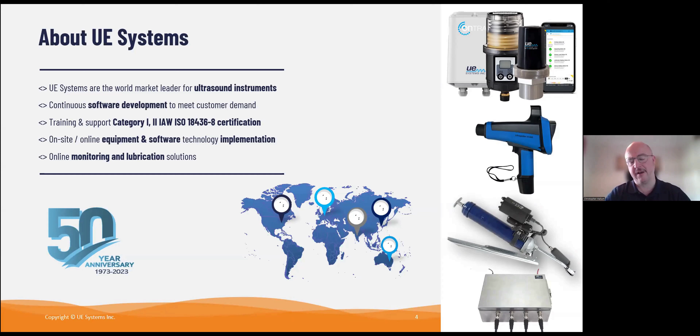So today, what we said we're going to do is talk a bit about ultrasound. I want to introduce UE Systems as well, so you understand who we are, who we're representing and where we're coming from. UE Systems, for those who don't know, are global manufacturers of ultrasound technology, providing tools and equipment along with software, training and support globally to users in the field, be that in industry or from a service perspective to service providers. We provide that reach globally. Based originally out of New York, we're part of the European division based out of the Netherlands, but we have regional offices all over the world with regional partners providing support in the local languages and local dialect.

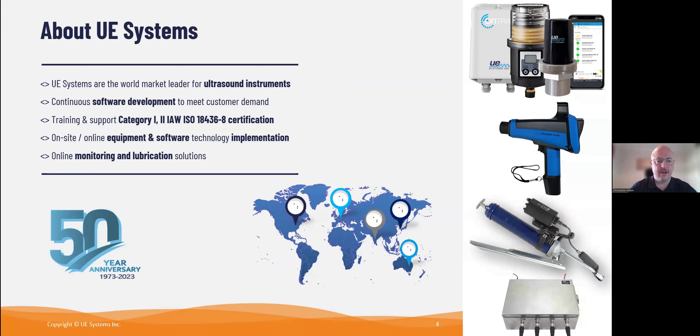James, a little bit about JPS please. Yes, so JPS Reliability was started about 4.5 years ago, myself and James Pierce, when we wanted to do things the best way we could and have full control - we wanted to do our own business. We've built up on decades of practical experience fixing real life problems using all the condition monitoring technologies. As a business, we support companies through reliability and maintenance, making sure they do the right maintenance tasks using the right technologies, which in the bottom line keeps production running.

So we're hands-on mentoring training. We do remote and on-site training. We do global support. So we support service, mentoring, and systems worldwide, and we support quite a few different sites around the world, assisting them with analysis and reliability.

Excellent. Thank you, James.

So some of the things that we wanted to cover here, and you'll probably all have seen different renditions of these P to F curves, depending on the technology that someone's trying to sell you maybe, or trying to convince you on. Something we want to talk about here is a lot of people talk about this in terms of reliability. And as you've just seen from our headline screen about improving the availability of your assets, making sure that you can have that asset running as and when required and keeping that uptime going.

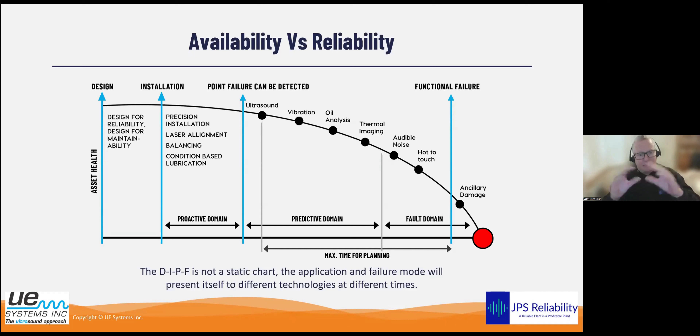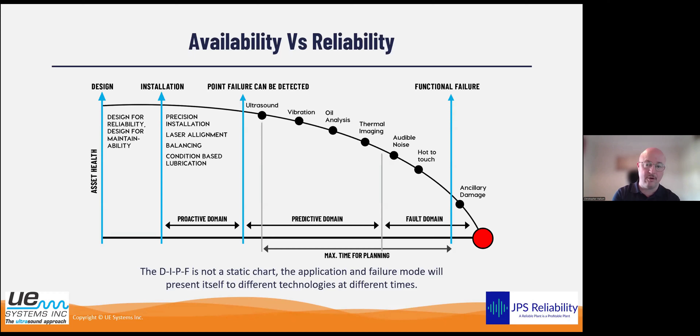So this helps guide people, and there's so many different PF curves for different types of failures. So it's a generic to help guide you to do the right thing. But in reality, nothing fails lovely like that. And the bathtub curve is basically 99% random failures. Absolutely. Theoretical. So it's kind of like a sliding chart, you could say, depending on the type of failure mode and the type of asset you're looking at. Yes. But again, we have multiple technologies available out there that can help guide us and spot those early warning signs.

So we decided to do this webinar today because we always come across a lot of people that like to have a bit of a fight between the two technologies, one versus the other. And from my experience in the world of reliability, we should never be looking at one versus the other, but actually understanding them properly and understanding how we can apply them as part of a mature, comprehensive program.

It shouldn't be ultrasound versus vibration. It should be ultrasound and vibration. How can we use them together to help us get the best data, to help us get the best from our assets and our plants? What do you think, James?

Well, as I say, at JPS Reliability, we use ultrasound, vibration, thermal, NDT, the whole toolbox of condition monitoring tools. And on jobs, often we use vibration and ultrasound together. And it's not that they are different, but later we'll delve more into where vibration does this and where ultrasound does that and how they really work well together. So they're not competing technologies, they're technologies we should use together, choosing the right range or application to use them.

Absolutely. And something we always have to think about as well is that when we're looking at a plant and at criticality analysis and at what can prevent things from happening in production, not everything that fails is down to something rotating. So we have to think about other applications as well, not just one technology for one area. That's where we can use these technologies to our advantage.

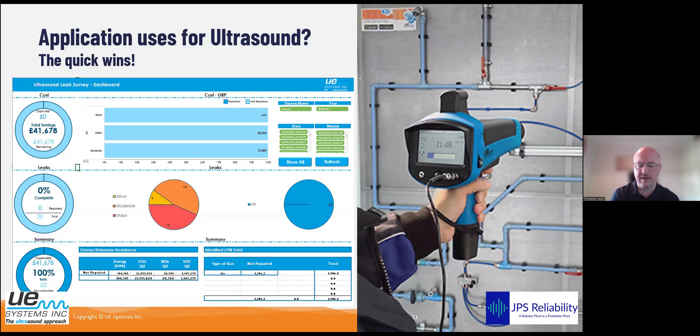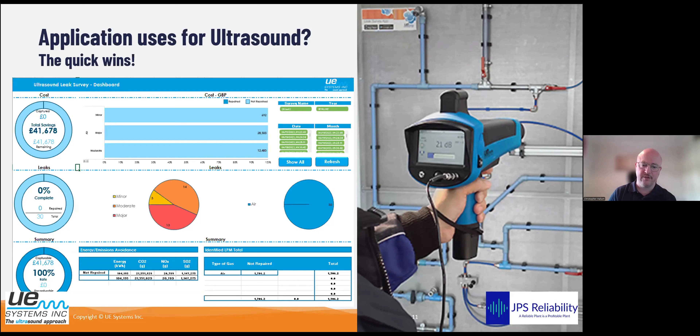If you look at the cost of energy these days, it's not cheap, and compressed air isn't free. And most plants on average will find that their leak rate is between 30 to 40 to 50% in places and poorly managed systems. So by being able to use ultrasound to identify leaks and put cost to them, we can get quite quick returns for our investment when starting an ultrasound program. So always something to consider when you're using ultrasound for certain applications is that leak detection is going to give you your quickest bang for your buck. So that's ultrasound.

James, how about a little bit of an introduction to vibration? Yeah. So with vibration, people who I've been on site with know I could chat for hours about this, but very, very simply, vibration analysis can be simple and it can be really complex. There's so many different types of tools, from very basic little pens to detailed analyzers to wireless and online stuff. And sometimes there's a bit of sorcery involved. You need to be a wizard, and you see all these squiggly lines and you've got to analyze it and tell the customer what's in there.

So basically, everything in the world moves. If we have a sensor sensitive enough with cabling and the correct data collector and setup, you can measure the vibration. So vibration is used 99% on everything in the plant for rotating equipment. If something rotates, it rotates at a certain frequency, and all those components in that motor, say, will have a frequency for each component. And we measure those frequencies.

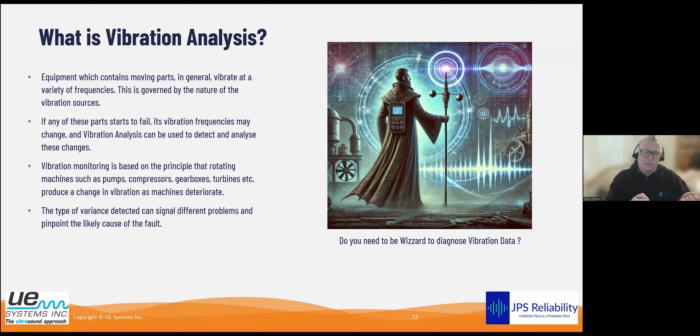And the theory is, and in reality, as assets start to wear and fail, the frequency would change, either modulate or go up or go down. So by monitoring the frequencies and measuring it, we can detect when there's a change. Now you can do that quite easily, but then you need to understand why there's a change and is it a risk to site.

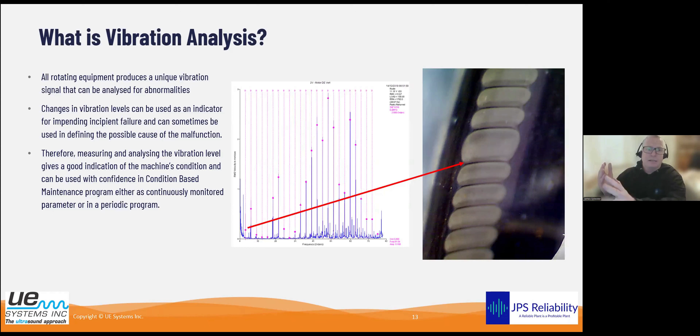And with vibration, where vibration and ultrasound are quite close now, is the technology advancement. So really high frequency, if you sample above 20 kilohertz, and some kits can sample really high on vibration, we can then do demodulation. So that's the first type, you see it there. Then you come back into acceleration and velocity. Now this example here highlights the importance of sampling.

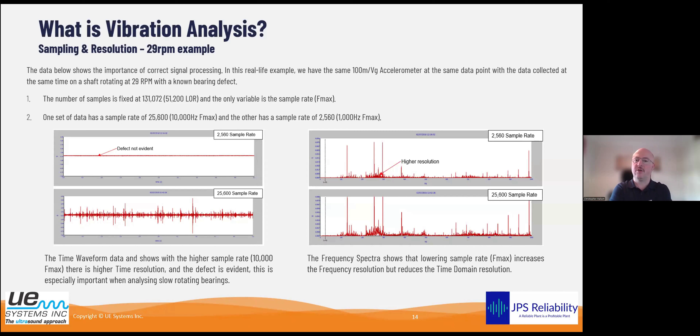I think this is probably a pretty good example of where a user on a plant could deploy both technologies for these sorts of things, depending on the equipment they actually have. And I think that brings us on quite nicely to one of our first case studies here today. This is one that I came across out in the field while doing a demonstration, actually. Something that doesn't happen very often is finding something as serious as this when you're out there. It's kind of picking the right time.

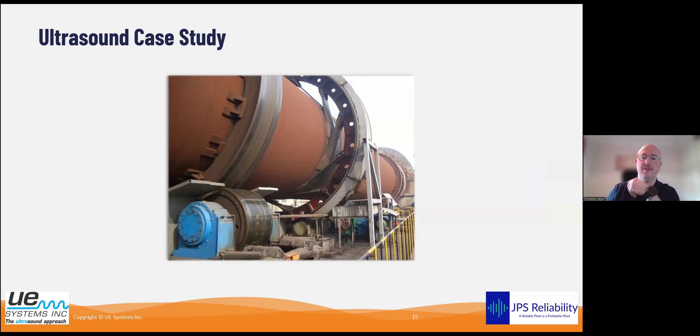But this was looking at some trunnion bearings on a kiln. I was utilizing the Ultraprobe 15,000 with a very simple contact module, setting the frequency to 25 kilohertz and literally listening away to see what we could detect. Now, this asset was extremely large with dual rolling element bearings, rotating at approximately 7 RPM. This asset was only 6 months old as well, so it's very new.

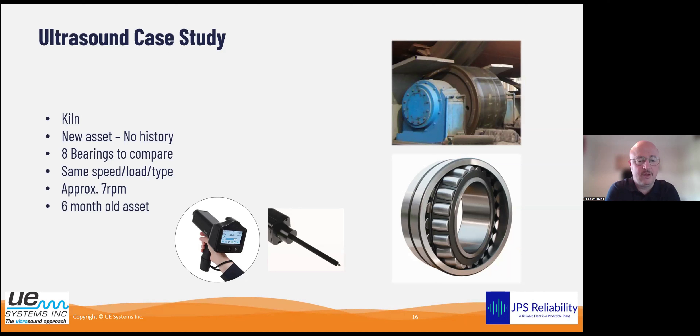But the engineers on site wanted to make sure they could use the right sort of equipment to help identify changes as early as possible, because if they had unscheduled outages on here, they'd have big problems. So we had a little look at each of the bearings on this asset. And because we had no historical data, we were going to use a comparison method to look at each individual bearing, just to get some data and an idea about what's going on.

So I took readings at the same point on each of the bearings, and 7 out of the 8 registered 0 decibels. I could hear a very faint white noise of the bearing, the friction of the bearing, in my headphones, so I could still do a sound recording to use as comparison. And this is what 7 of the 8 actually sounded like. So as you can hear, smooth and uniform, and looking at the time waveform there, nothing sticking out, looking pretty good.

Now I came to the 8th bearing, and in my headphones I could hear a very faint ticking sound, and I could see a register of 2 decibels on the screen. Comparing that to the other 7 at 0, that's quite a rise when they should all be around 0. Using the software with the Ultraprobe, I was able to amplify the sound to show the user what was being detected, because my initial concern was that there was damage to the bearing. I wanted to do more analysis first, but my first thought was there's damage occurring.

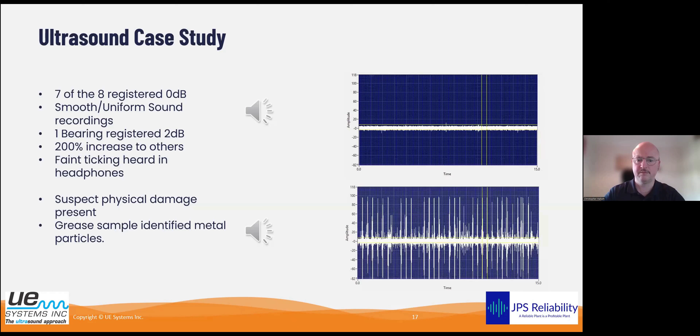So as we can see, by just doing simple comparisons, all of those bearings were under the same speed and load and same design, same type, and yet 1 of 8 looked very different to the rest, and you could audibly, clearly see that there's a difference there.

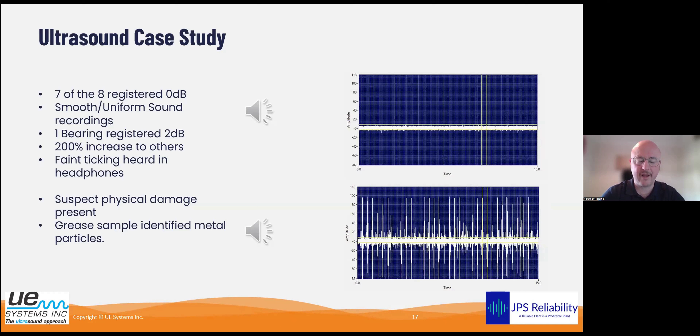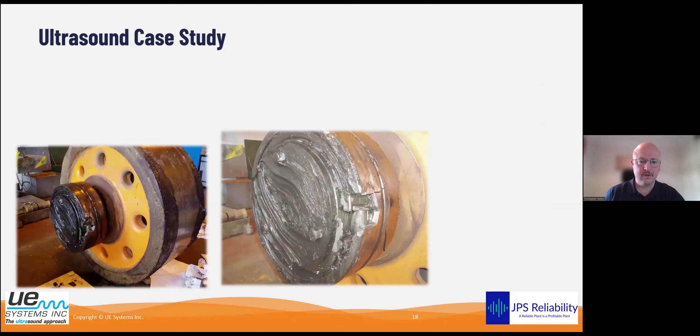So eventually the site took my advice that there was something seriously wrong here. They planned in the maintenance, and a week or so later, I had some pictures sent through to me. As you can see on the screen, as they took the bearing out of the housing, part of the outer race had fallen off. The cage had been damaged and one of the rolling elements had moved 90 degrees.

And we could see that in the time waveform as that rolling element slid over the cracks instead of actually rolling over them. It turns out upon further investigation that this was damage on installation as the kiln was being lowered down and impacting.

But James, I can think of at least 3 high-end vibration kits where, if correctly set up, you can pick up defects, and we've had defects, would you believe it, with a quality 100 millivolt G sensor on the dual rail mount down to like 10 RPM. If you sample correctly and know what you're looking for, like ultrasound, you can pick it up, but there's only a few kits can do that at the moment.

That's the thing, isn't it, James? It's just making sure you understand it, really. Yeah. And making sure you get the settings correct. And if you have the capability, that's great. But it's also not listening to every sales guy who says they could do this when it might not be able to. So it's all about getting the right things in the right places, isn't it? So, yeah, understanding what you're getting. Absolutely. So yeah, this is one of my favorite case studies.

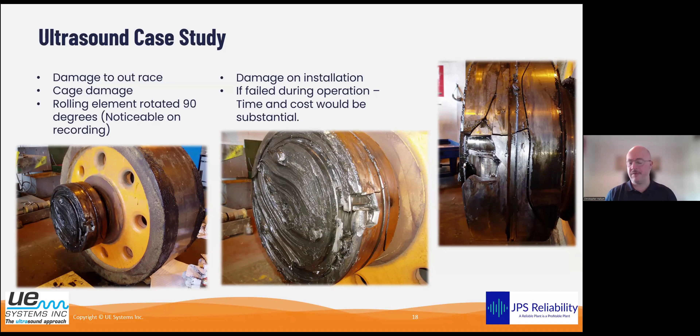But I think I've had enough of talking for a little while, James. I think we should pass over to you, and you just let me know when you want me to move the slides.

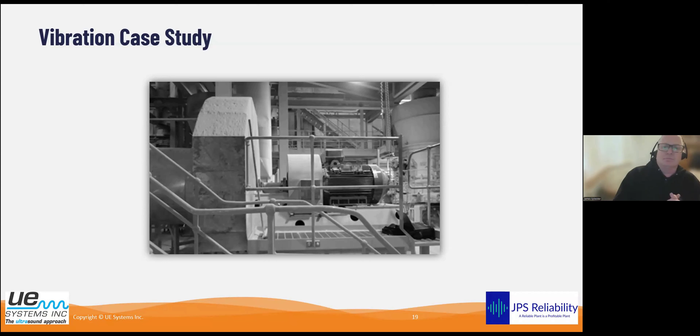So we've got over 100 case studies in the Book of Gold. So I'm just going to go through one quickly. At this particular site, we got a couple of motors and fans, and they're standby duty. So if you look to the next slide, Chris, it's noisy. You go on site, it's a noisy atmosphere, a noisy area. And like Chris with ultrasound, you don't need history to diagnose a defect and put a risk against it, if you know what you're looking at and you understand the machine.

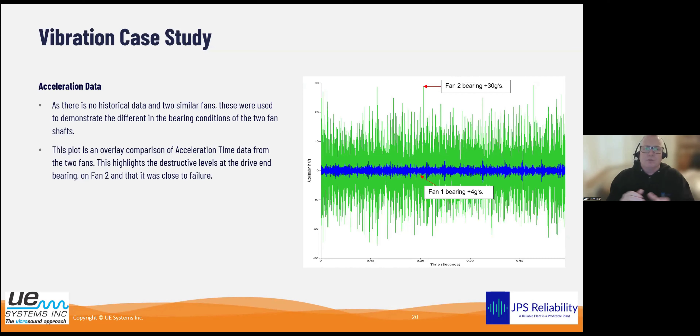And this one was at 4.9 orders. Most software now with vibration analysis, all the software, the online stuff, offline, if you know your bearing, you could type it in, it gives you pretty little cursors, but you do not need to know what the bearing is to call it a bearing defect. You've got to understand the waveform and the pattern and the data.

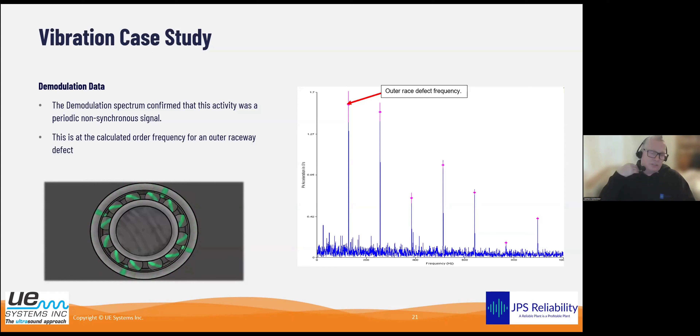So what you've got to think when you come to real life situations: you've got this big bearing, could be covered in grease, or you clean it off. You're not going to scrape it down, file it, rub it down with emery cloth, put a bit of beeswax to get a good contact. You're doing routine monitoring, you're using a sensor, either a flat or dual rail.

And also, if you imagine the bearing there and the bearing spinning around, for that inner race, it has to be loud enough to pass this or transfer the pore grease through the rolling elements out to the outer race, to the outside, to measure it on the outer race. So we saw the outer race signal higher.

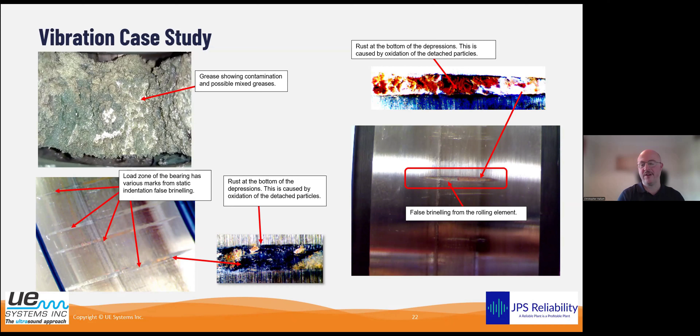Absolutely. Root cause analysis, identifying what caused it in the first place, and then finding ways in which you can then mitigate for that and reduce that will actually then in turn help improve the reliability of those assets. So absolutely, yeah, I think that's a great message for us to get across there.

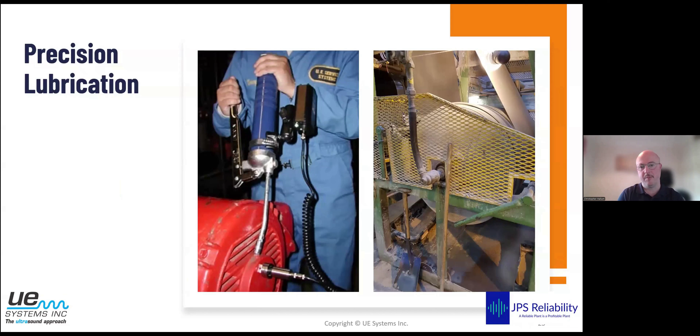So another big area when it comes to these two technologies is lubrication. It ties handily in with rotating equipment and our bearings. You know, it's one of the areas that sometimes it's just so overlooked in some places. I think it's starting to get better in some places, but it's still an area that I think is highly overlooked. If we look at premature bearing failures, 80% are caused by some form of poor lubrication practice, whether that's contamination, using the wrong type of grease, going long periods without greasing, or putting too much or not enough in.

How many times do you see people have a PM that says 10 shots of grease and they'll put one in just for luck, things like that. James, you must see this when you're visiting customers on sites, the bad practices that are out there.

They make them cheaper, they make them thinner, they don't last as long. They come up with sealed bearings, which are sealed for life of the grease, not the bearing, and they push lubrication down, down, down to the bottom where lubrication is the lifeblood. If we're not fixing lubrication, aligning, balancing correctly, then you're on a hiding. Your assets aren't going to last. And using vibration and ultrasound together, you can start picking up misalignment, bearing issues, grease issues, and start eliminating it.

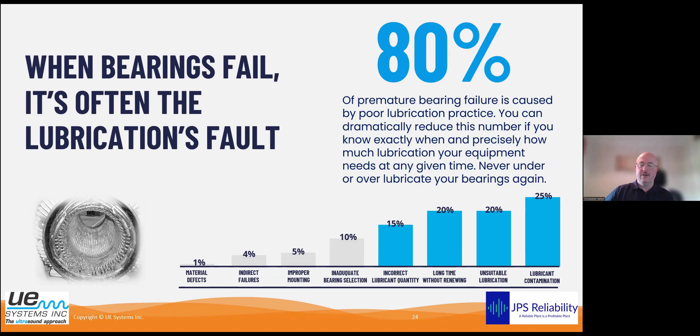It's having all those things in place because the amount of times that I've seen a company invest in technology to help their lubrication, yet they're going around and picking up a grease gun off the floor to go and grease something, not knowing what's in it. It's not going to help. Getting the basics right first is equally as important because if you don't have those, then you're onto a losing streak already.

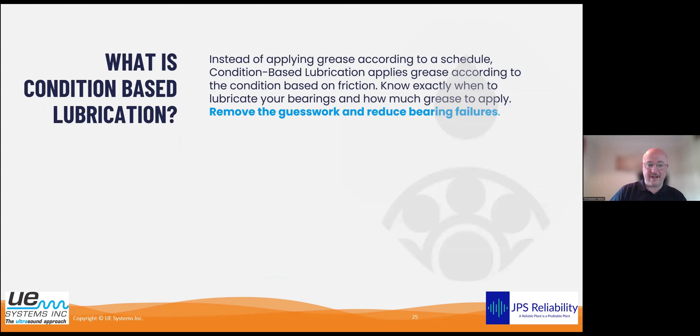So let's move on from our tragedy that is 80% of premature bearing failures being lubrication related. It's all down to friction. If we don't grease our bearings correctly, or we allow contamination to get in, or we have too much going in, it's going to affect the level of friction in the bearing. And that friction is going to get worse and worse and cause more and more damage to the bearing itself.

Now, if we think about traditional, most commonly done time-based lubrication practices, people will go and grease their bearings at a certain interval with a recommended amount. Now, that recommended amount, is that the right amount? That's always the question I ask. And the answer is normally, oh, I don't know. It says it on the PM, so that's what I'm going to do.

And so they do that, and then they take a look at the bearing sometimes and think, I don't see any grease coming out of the side, so I better put some more in. Oh, now it's coming out the side. Now I'm happy. Oh dear. So if we think about time-based, is it the right time when they do that? Does the bearing need it actually at that time every single time?

So this is where predictive technologies can help us with identifying that changing condition. If we think about it from an ultrasound perspective to start with, is that we're looking at the friction. The friction generates the ultrasound. So we can look for that early change as that friction level starts to increase due to a reduction in lubricant in that rotating asset.

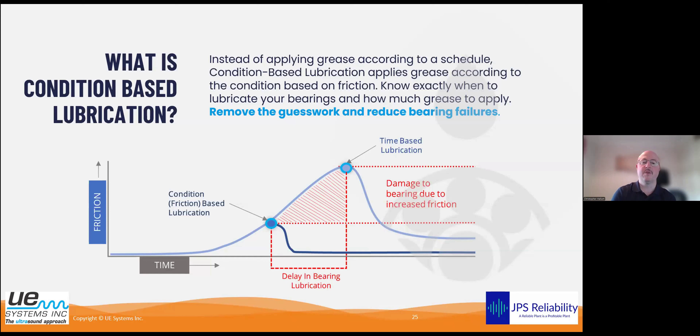Absolutely. So we'll give some examples about what lubrication looks like through ultrasound and through vibration shortly. If we think about it, and we know people haven't got time for these things, the correct way to grease a bearing would be small amounts at a steady rate while monitoring it as we go along. Now, a lot of people have a lot of things to do and a lot of bearings to grease, so I'm going to show you on this next slide what lubrication looks like ultrasonically.

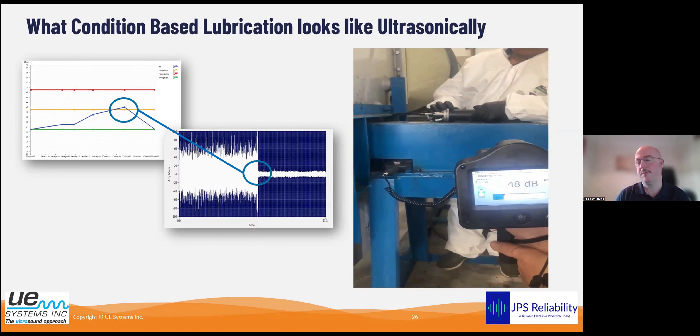So as we can see there, we started at around 58 decibels. What we should do is grease slow and steady, watching the ultrasound level reduce. Once the ultrasound level doesn't reduce any further, that's the bearing telling us to stop - have I gone through too many here for some reason? There we go. Once it doesn't get any lower, we stop.

If we start to over-lubricate the bearing, we'll see the value going up. So as we saw there, he probably put about 6 or 7 shots of grease extra into the bearing, and we saw the value go up. That was an indication of over-lubricating. But greasing a bearing with ultrasound can be as simple as monitoring the decibel value. If the bearing needs it, we'll see it go down. If the bearing doesn't need it, the value is going to go up, so we stop straight away. That way we can get a better idea of how we grease it.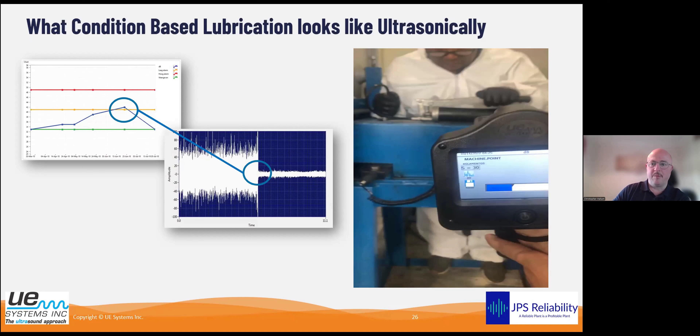So, James, I'm going to pass the next one over to you. Yes, so this is the video of greasing with vibration. Is it working, Chris? I'm going to play it now. There we go, yeah, there we go.

So on this one you can see a waveform live and it's sampling. As you grease, the waveform will come and push down. Oh, jump forward - something's playing up with my computer at the moment. No worries. So when you grease a bearing and you're watching the waveform, as you grease you suddenly see the waveform dip and go. This is what we do on most sites when we're doing vibration analysis, like that. See, it dips and comes down.

The benefit of this is when you're looking at a waveform, you can see basically the pattern in the waveform - you can see whether it's got a periodic impact. So straight away you can go, you definitely got a bearing defect. You can grease it - we had some where it can actually increase, because you could be pushing through grease which has been sitting in a 12-inch pipe for a year and it's gone hard and separated. So you're monitoring it, measuring it, and you can see how it's changing.

Now, on some sites, if you've got lots of machines, what we would do is have a very simple ultrasound tool, because you've got to think about your time and utilization of people. So you'd have a very simple solid ultrasound tool to go around on a routine and measure your bearings' dB level. And if it doesn't change, it doesn't change - you leave it alone.

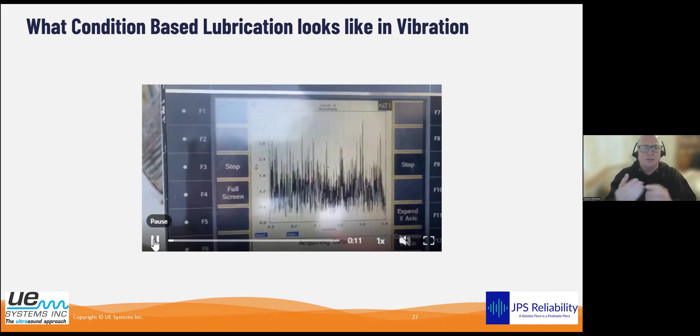If it goes up, you grease it. And then you have a backup as well, where you have the vibration people hitting your critical assets, and they're looking for early bearing defects. And the main things on most sites are misalignment, balance, and looseness. So you can use a combination. And on some sites where you only have a few machines and you're just doing vibration, you can do the greasing and vibration at the same time.

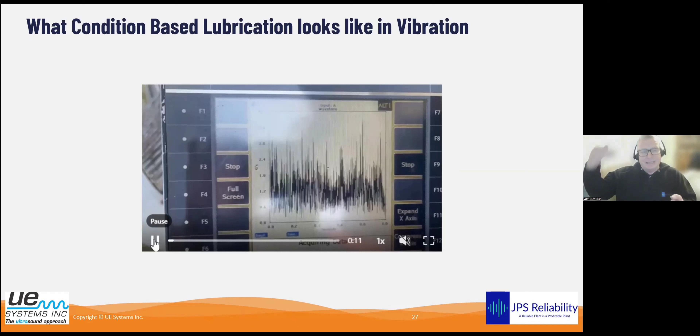But the downside is you can't do this with the low-end vibration tool you buy. It's usually on the high-end kits where you can see things live, up the sample rate really high, and do some sort of live demodulation reading. So it's knowing exactly when to use what tools, and that greatly depends on your assets on site, your resources, your skill levels, your failure rates, what you're fixing, what's not going to fail. It's a massive thing to work out what to use first, but you can do greasing very easily with vibration if you know what you're doing.

Excellent. Thank you, James. So with all of this, this is still taking a manual approach. As we saw a couple of slides ago, with time-based data collection helping us identify early lubrication needs, there's still a risk and an element there that is human. Us humans are the most unreliable things out there. We are the cause of all of our problems. So having the ability to monitor that friction level more frequently means being there at the right time when the bearing actually needs it.

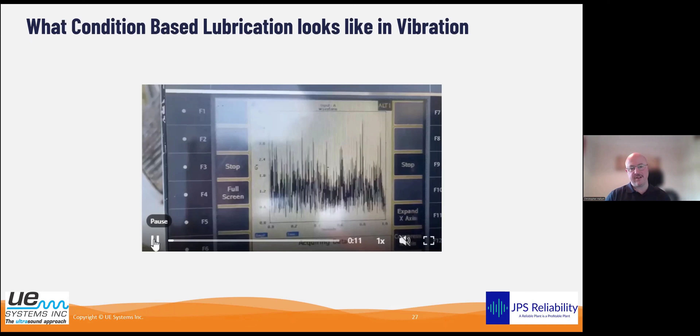If we think about our highly critical assets, we could improve the lifespan of our assets even further by taking a different approach. With the advancements in technology, that's becoming more apparent in this day and age. From an ultrasound perspective, things like the OnTrak system will now monitor the friction of the bearing 24/7. And when that friction level reaches its lubrication alarm levels, it autonomously applies the right grease at the right time and in the right amount, which helps improve the lifespan of our bearings.

So we have the manual approach of time-based, just putting in what's recommended. We have time-based, condition-based lubrication still there. Now we have IoT-enabled autonomous condition-based lubrication that's there 24/7. So technology is advancing, like James was saying about how ultrasound and vibration are merging into similar areas now. This is a clear example of how that's actually happening as well.

And with stuff like this, you also have to think of the clients who don't have 20 fans or 50 gearboxes on site to warrant getting a consultant in or doing it themselves, or who have remote locations. When you've got a system like this, it can monitor it. And if it's greasing and it's still going up, you can get a technician or engineer to site to investigate what's causing it and what's changing. And they're a big step up from the old auto lubes, because we see many auto lubes on routine surveys where people don't put dates on them, and you go back and ask, is that the same one from last year? And no grease has gone in there. So it really is a good advancement.

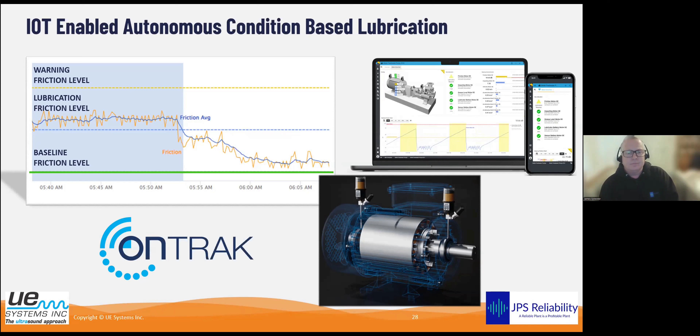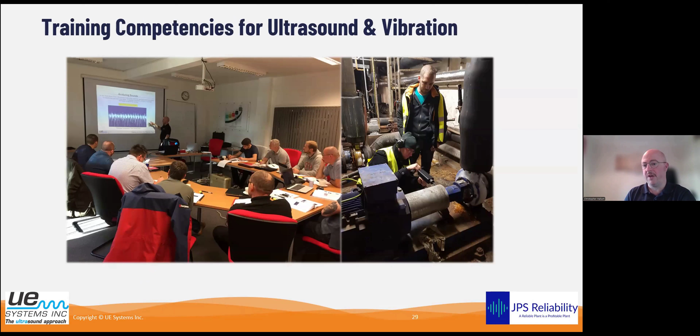You have to still be able to use those out there. So let's look at the other side of things then when it comes to ultrasound and vibration, and looking at training competencies and what actually is behind that side of things, because these sort of technologies are not things that you're going to just go out, pick up, and expect to be able to use to a high level straight away. It takes time. And there's different levels of training.

And James, maybe as a person that's written books on these sort of things, you can go into a bit about this as well. Yeah. The biggest thing I've seen is ISO training is great. It says people can understand things. It says people can learn. It says they can pass a multiple choice exam and get a certificate. So they've been trained ISO. That does not mean they're competent.

It's a great thing, ISO, because it does help, but you have to bring in competence, because if you just get a really intelligent person to sit the exam and pass it, they got ISO, but that does not mean they can help you with your system. You got to understand your assets. In the Book of Gold, we got some pearls of wisdom, and we often share them on LinkedIn to keep reminding people. When you do a condition monitoring reliability program, the most important thing is the person you pick, who's doing the data collection and analysis, has the right attitude. And then it's the training and mentoring.

You can have all these salespeople come in, automatic this, automatic that. Oh, we'll do a free course, it'll all be perfect. And then they go away. They've done a sale and they're gone. If you buy something, you need someone you can sound off and feedback on and learn from. And don't forget, if you've been on your plant for 5 years, yes, you got 5 years of experience on that plant, but if you've done the same thing each year, it's 1 year's experience 5 times. And always ask, why is it failing? Simple things. Always try and find out why it's failing.

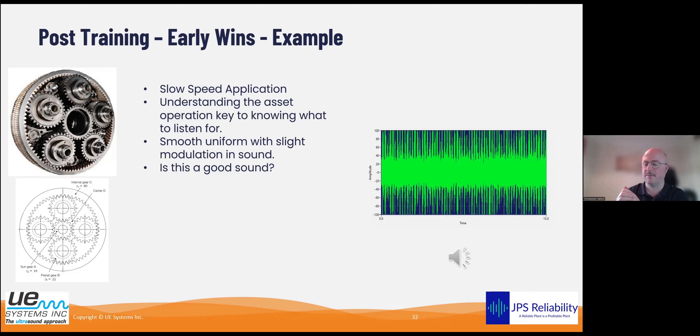So the next step they did was to then bring one of the support engineers from UE Systems in just to have a little listen with them as well and to kind of help guide them. The next step to take was to inspect the oil, look at the oil, because there could be some signs in there that can tell us what's going on as well. Being newly refurbished, when they went to check the oil, it's what they didn't expect. And they found that the oil was black already, which wasn't a good indication.

So when they looked at it, it turned out that the wrong type of oil had been filled in the gearbox, which meant that the level of friction was higher than it should have been because of the lack of viscosity. So if left undetected, it could have caused more and more damage. What they did was got it cleaned up, got the correct type of oil applied into the gearbox, and then they tested again. And this is what it sounded like with the correct type of oil.

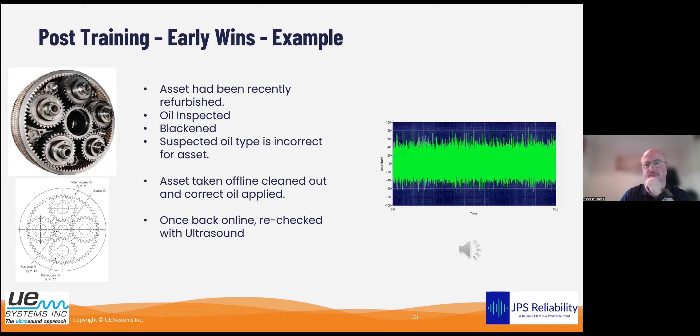So just to emphasize there that this was post training, they'd had some training, they had some understanding, and they found something very quickly. And the change was only just as much as the wrong viscosity of oil that made an increase in friction that then helped them with identifying the issue and moving on, avoiding a failure, but also asking questions of who refurbished that asset as well.

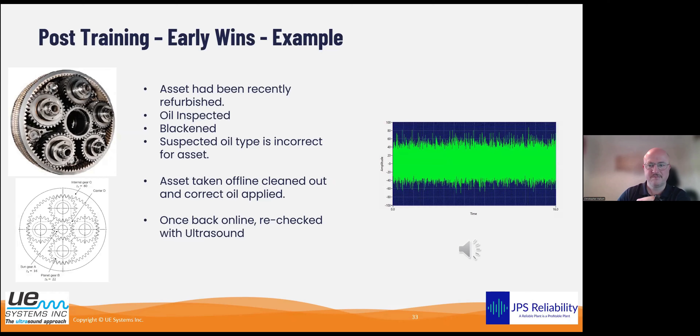So, James, being somebody out in the world of service and providing mentorship and training and everything else around reliability, how would you talk about the use of ultrasound and vibration in harmony? We use them both all the time, from high-end vibration kits, and then we just got a very simple ultrasound tool to listen to the bearings, so we can think vibration and ultrasound together, all the way through to high-end cameras and high-end probes. It all comes down to the failure mode: static, electrical, mechanical, process, and you pick the right technology which will pick it up when you need to pick it up.

So we have all vibration and ultrasound kits within the business, and we utilize them together. And at all times, even when my guys are collecting vibration data, they've got an ultrasound tool and they're listening to things as well. Because when you can hear it and you can see it in the VA data, it helps people learn as well and pick up defects better.

Excellent. And also maybe, James, for people to be aware that on a plant, it's not always the rotating asset that's going to cause the downtime. No, understanding things like steam systems, steam traps, valves, electrical inspections, leak detection, energy savings, there's process leaks that can cause outages and stuff like that too. That's another good example of how they can use these sort of technologies combined.

Oh, definitely. We do that for a few clients, where you do a whole package where you're capturing the centralized steam systems, air leaks, high voltage panels which you can't open. Ultrasound's brilliant. You can put the sensor on the door, use it like a speaker, and you record the sound within the panel which you can't open, and you can pick it up. I've picked up mechanical looseness of baffle plates moving at electrical frequency. It's brilliant, and it's a combination of vibration and ultrasound together. You could get nearly all the defects easily.

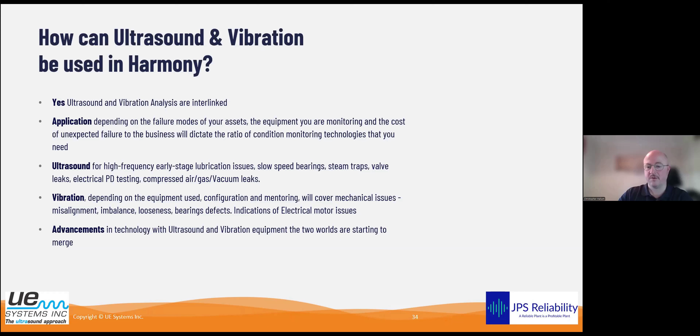Absolutely. I couldn't agree more, James. Now, we were talking there a bit further about the integration. I think these slides just re-emphasize what we've just been saying. If we go back to the early days of the 60s and 70s, where these were just simple analog devices, and how they've evolved into this day and age. And as we were saying earlier, the two technologies are overlapping in places these days, especially at the higher end.

Yeah. They do that because they have varying abilities, where you've got vibration equipment that can sample in the ultrasonic spectrum. You've got ultrasound technology now that has built-in vibration. They're all coming into that sort of remit. But again, not everyone can afford the high end. So it's understanding how to utilize their tools to the best they can. It's saving as much money as you can for the business with least cost and picking the right tool from the hundreds on the market.

Don't pick the wrong one. Absolutely. And that's where getting independent advice can be very important, to make sure that you're not given or recommended something that isn't suitable to what you actually need. Say you get lots of MEMS online sensors, and everything in vibration has its place. There is a place for the low end stuff. There's a place for the high end stuff. It's when the low end stuff is sold as finding bearing defects when it can't. Well, it will when the bearing's fallen over. So it's understanding what your system can give you, getting your expectations correctly aligned to what you buy. Then you know how it works.

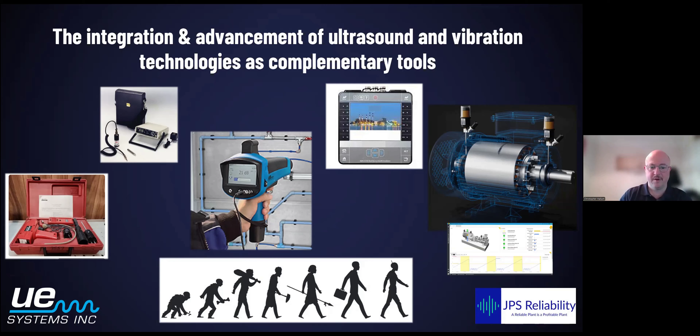Absolutely. And again, just going into the simplicity side of things, it's not a one versus the other sort of thing, but we're talking about lots of applications. It kind of emphasizes it, doesn't it, really, about using the tools to your advantage and working them together. Don't use one or the other. Use them together to get the most from your assets.

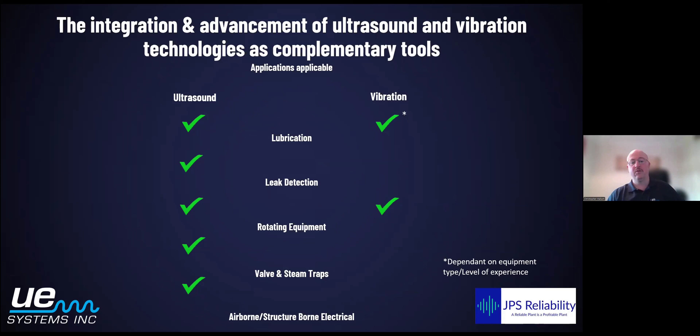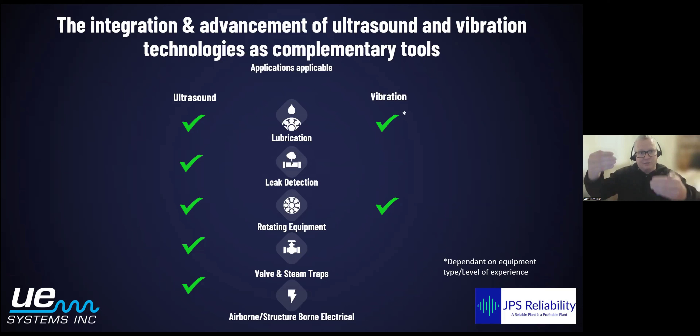I think what people see most of the time, because 90% of everything in a plant is rotating assets, people only think rotating assets, they do vibration, but they do forget it's quicker to check grease with ultrasound. It's easier. They forget the electrical panels can blow up, your steam systems, your air pressures, your bearings, your rollers, your conveyors. So don't just think of that. You've got to think of your whole plant, your whole system. And this is where you can use ultrasound and vibration for different failure modes, and they do sort of overlap as well.

And again, the technology is not going to be the savior of all your problems. Think about all of the basics first before you make that investment in technology. Get the basics right.

I can see that we've actually gone over an hour, James. Oh, geez. So we're good at talking like that. Yeah. It's one of those things that we can get carried away, but we're passionate people about what we do here.

And I think those key takeaways about people understanding that one technology will not cure all your problems, that's a given. But then with the right equipment for the right applications, you have to have the right training, the right ongoing support to build that knowledge and experience and that confidence. Is there anything else that you want to add, James, before we start to wrap up?

Yeah, one very important thing. Remember, all these technologies do not improve reliability. They will tell you when things are failing. You can't work out why they fail if you don't understand your system. So physics of the machine is so important. If you don't know how things can interact physically in the machine and fail, yeah, you can pick up that it's shaking and is going to fail, but it's going to fail and fail and fail.